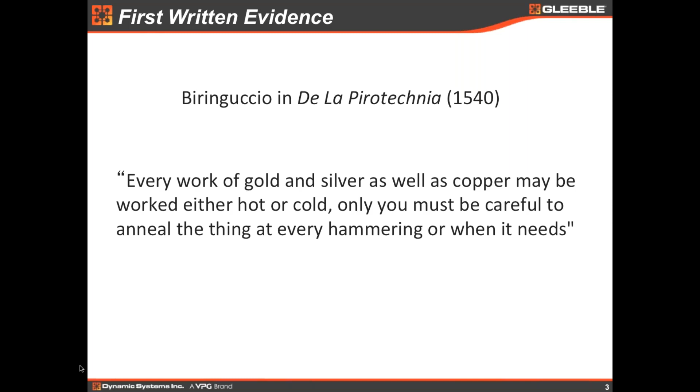In this overview, in the upper part, you see the changes in properties along the recrystallization process, and below are schematic figures of the microstructures.

We have here the deformed state, with a lot of defects, mainly dislocations. This metallic material is hard and has a high strength.

As we start the annealing process, increasing the temperature, we see a decrease in strength and hardness. This is due to the annihilation of dislocations and their rearrangement, forming the subgrains, which you can see here inside the grains.

After that we have the nucleation and growth of the recrystallization process. Here a high angle grain boundary moves over the work hardened matrix and over the subgrains, and then you see a deep decay of the mechanical properties and an increase of ductility and formability.

So after the end of the process, we have the fully recrystallized microstructure, full of grains and with very low density of dislocations, as opposed to the initial state. So you have a big decay in strength and hardness, and an increase in ductility.

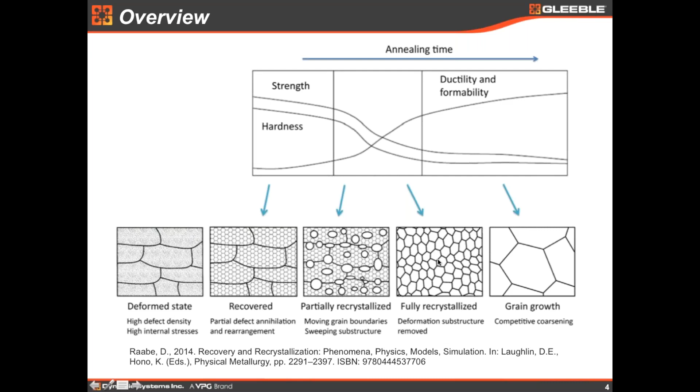It's important to remark that of all the energy spent to deform a metal, only about 10% is stored in the metal as dislocations and other defects. This is actually the driving force for recrystallization to occur.

This driving force for recrystallization is very low compared to other phase transformations. For example, copper solidification is about 13,000 joules per mole. Solid state precipitation is 2,100 joules per mole, and recrystallization of work hardened copper could be, let's say, from 10 to 50 joules per mole.

So we see there is an order of magnitude difference, and grain growth is even smaller. We'll cover these numbers later in this presentation.

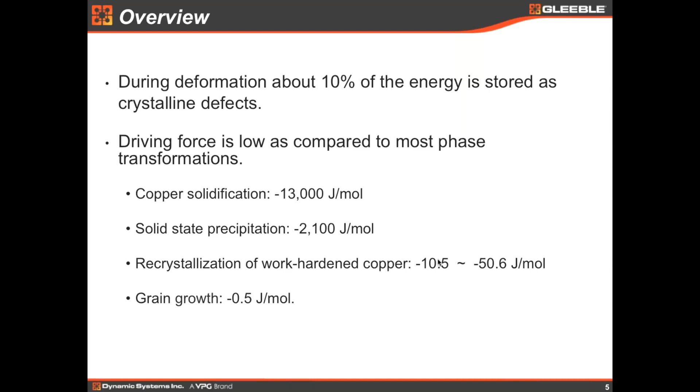Why does recrystallization happen? This is an important question. In the work hardened state, due to the defects, we have a higher free energy, and in the recrystallized state, with very small amounts of defects, we have a lower free energy. So if we give thermal conditions to that system, the work hardened state will overcome this activation energy and will recrystallize. This is an energy view of the recrystallization transformation.

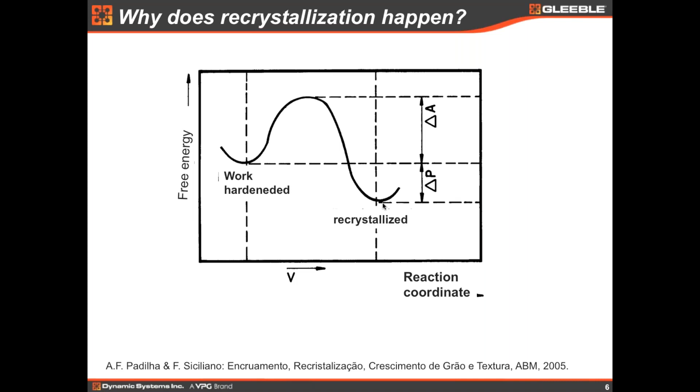Now let's discuss the driving and dragging forces. The main driving force for recrystallization is the dislocations, and it can be calculated using this equation. We've seen these equations a million times in papers and books, so I'd like to attach some numbers to all these quantities.

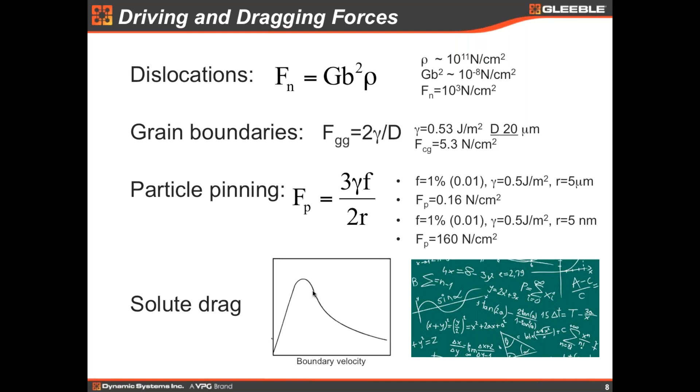On the other hand, at very high velocities, like in dynamic recrystallization, which happens very fast, the grain boundaries almost ignore the solute atoms. I think the highest effect is on static recrystallization, so this is the peak. Of course, there's a very complex formulation for that. I have many papers—if you're interested, let me know, and I can mail you the classic papers on solute drag. So let's cover it like that. Let's stop here for now.

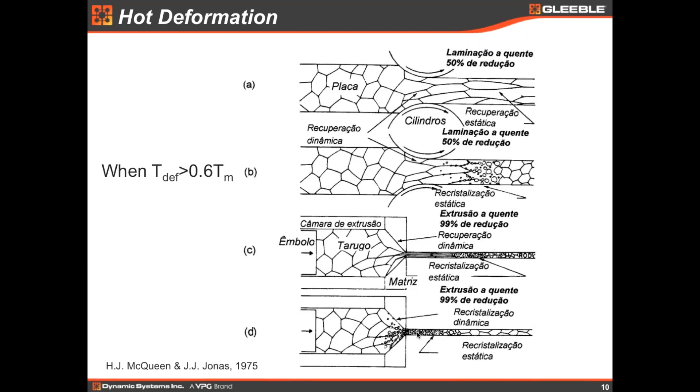So this is basically a summary of what can happen when we do a hot deformation in a metal. We can see here metadynamic recrystallization - it's a very simple concept. We have strain accumulation in the passes, and at a certain time the accumulated strain is so high that we nucleate dynamically recrystallized grains in the deformation zone, and they grow as static recrystallization outside the deformation zone.

So this is metadynamic or post-dynamic recrystallization. We have dynamic here inside and post-dynamic after that. I think this is a very clear concept, no big deal.

Just to finalize this first part, again I want to remark that recrystallization is not a new science. It's a very old science, as we saw in the 1500s, and in 1952, Burke and Turnbull formulated the laws of recrystallization.

This basically summarizes everything we need to know to use recrystallization in an industrial process or to study recrystallization for doing research. Basically, these are the main laws that include static recrystallization. We also have some annealing temperature - the degree. One of them talks about the deformation temperature, but also it includes grain growth in the last one. So this basically summarizes everything.

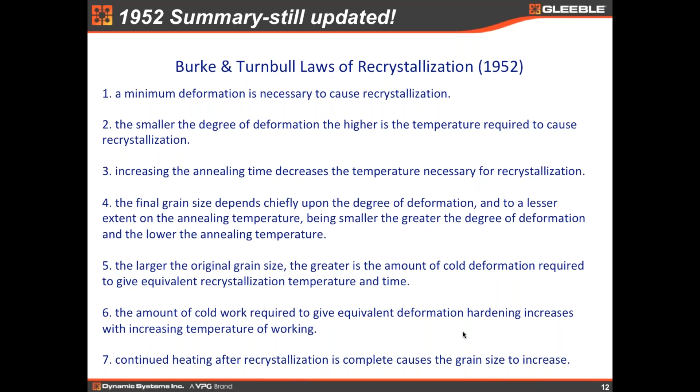Now I'd like to show how Gleeble can be of great advantage to study recrystallization. We have a few points to consider. Firstly, it's a fast and reliable method to perform heat treatment. It's very easy to use, very easy to mount a specimen, and to start a test and program the machine. I think one of the most important things is it's very reliable, with accurate data recording.

Very precisely recorded, so we can have several temperature measurements in different positions of the specimen and so on. And I think maybe the most important is that due to the Gleeble system using resistance heating, we have a uniform temperature profile. This is very important in recrystallization studies.

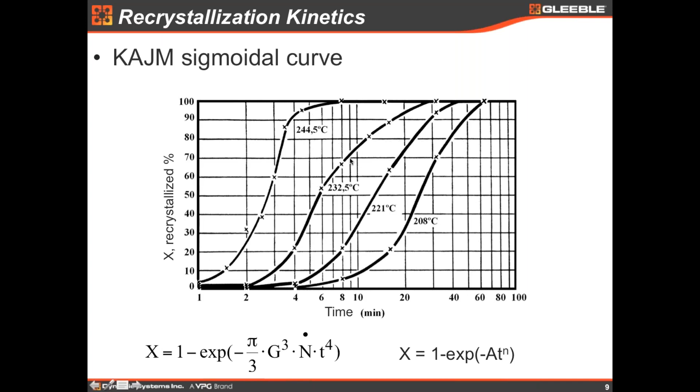So let's come back here to this figure. You see how is the effect of just 12 degrees on the recrystallization kinetics. We can easily have a gradient higher than 20, 30 degrees when you heat a specimen with a different method than resistance heating, that is uniform across the cross-sectional area of the specimen. So it's very easy to see that this has a remarkable effect on the rate and kinetics of recrystallization. I think this is one of the main points.

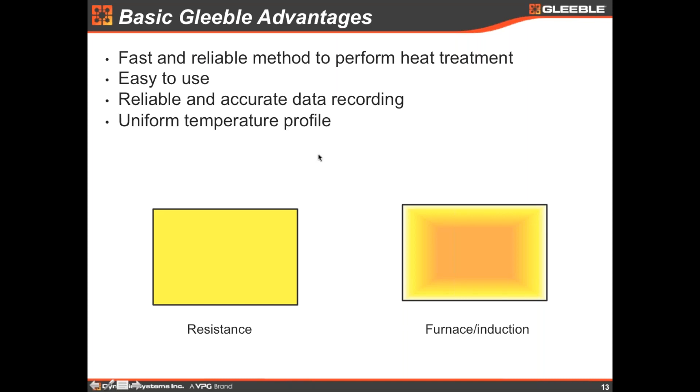So I have a work hardened specimen, and I put that, I mount that into the Gleeble, and then I program this time, let's say 1.5 seconds at this temperature, and then this time again at this temperature, and several times.

And I take all the specimens, I go to the lab, I mount the specimen, I grind, polish, etch, look at the microscope and do the quantitative metallography, and then I see how much is the recrystallized fraction. So I have the first curve.

So this is a very simple heat treatment. I think the advantage of using the Gleeble is that you have uniform temperature across the cross section of the specimen, so you can rely on what you see in the microscope. If you see close to the surface of the specimen, you can see a different microstructure as compared to the center of the specimen. It doesn't happen at the Gleeble.

So the same thing can be done. This is time consuming, of course, but at least you can generate these microstructures at the Gleeble. And not only the recrystallized fraction to check the kinetics, but you can also measure the grain size, so you know the grain size and the static recrystallization evolution.

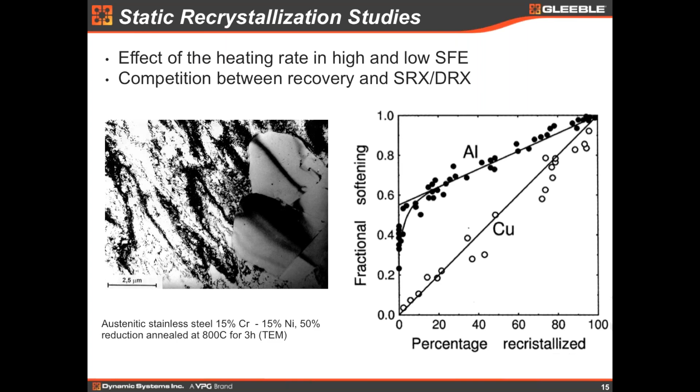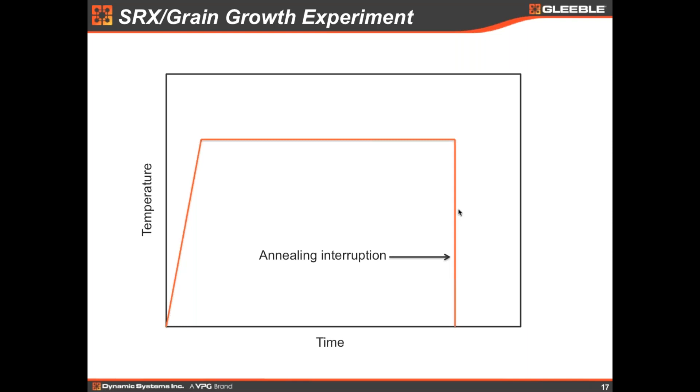So this is an example of the time temperature graph for static recrystallization and grain growth experiments, where we have a ramp to temperature and then time at temperature, and then we interrupt the annealing by quenching or just turning off the heat. This is a very simple experiment to produce reliable, uniform and reproducible recrystallized samples.

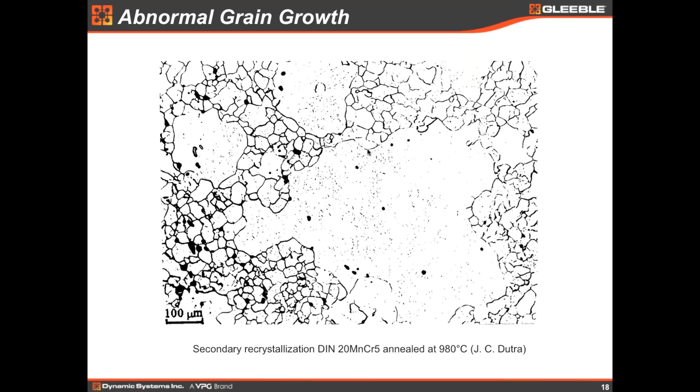There are three ways that these abnormal grains can be formed, and one is the partial dissolution of precipitates in certain areas. So in certain areas we have the dissolution of precipitates, and then the grain boundaries that were pinned by the precipitates at a certain time get free to move, and then they move faster than the other grains, growing faster and absorbing the normal or small grains. This is basically the most common way to generate abnormal grain growth and form these big grains in the microstructure.

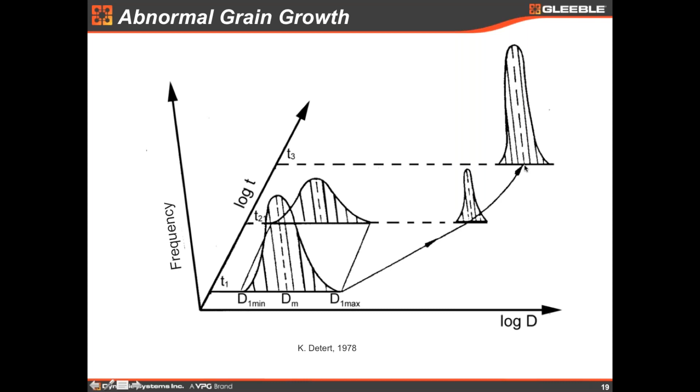As a frequency analysis here, we have the time and the grain diameter. We start from a normal distribution of grain sizes. After a partial dissolution of precipitates, we have this bimodal distribution of grain sizes where you have the normal grains here and very big grains here - these are the abnormal grains. At the end of the process, we have only abnormal grains. So this is a disaster for mechanical properties, right?

So how we can study that? Well, one of the possibilities - of course we have to study case by case why the abnormal grain growth is happening. But usually it's associated with high heating rates, because at high heating rates you have a higher probability to have this partial dissolution of precipitates in certain areas, and then this will generate the abnormal grain growth.

So we can check - you can go to heating rates higher and higher. As you may know, the Gleeble can go to 10,000 degrees C per second; this is the maximum we can go, and we can see how these high heating rates can trigger the abnormal grain growth. So we test the different heating rates and check what happens. So this is another example.

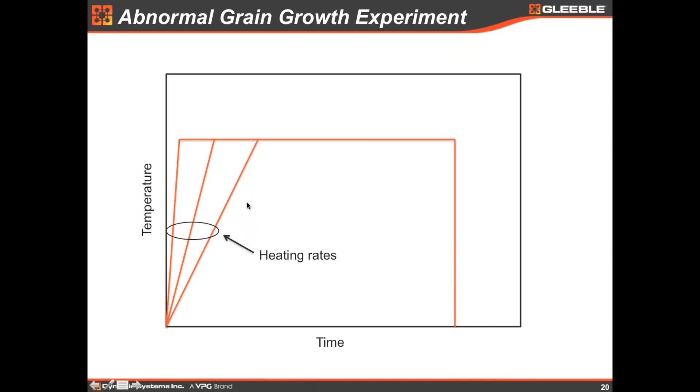And then he said, oh, what about the processing parameters? We want to correlate the recrystallization kinetics with the processing parameters that we are preparing or processing our steel or our copper or our aluminum at the plant.

So it's easy to derive, by performing mechanical testing, the time for 50% recrystallization or 50% softening. We consider for austenite that they will be equivalent.

So we have a way to derive the T50 and correlate that with the actual processing parameters or actual experimental parameters. So that's why this became very popular, to use the sigmoidal curve equation in this form.

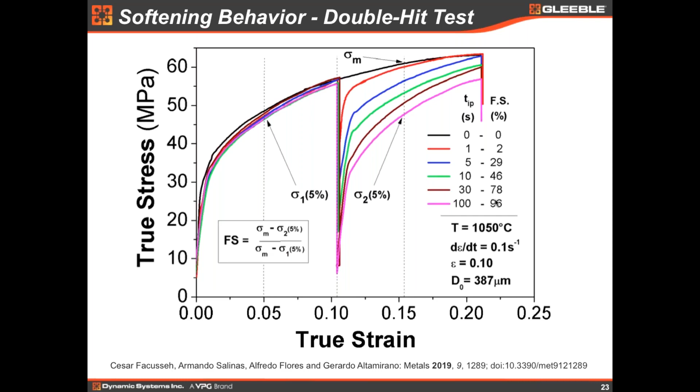This is very important in hot rolling because we know what kind of load to expect in the next pass. Extremely important. Also, we can estimate the grain size by doing different deformation schedules.

We see here several passes with small deformations at constant temperature, and then fewer passes with high deformation in the beginning at high temperatures, then lowering the temperature, increasing the stress, and having lower deformations at the end.

Or we have these two big deformations in the beginning and 3 small, or 3 small in the beginning and 2 big. So we can test all these crazy rolling schedules, and at the end you can get a sample and specimen and measure the grain size. So we see that there's a big difference.

So this is a typical industrial deformation process. We see that we reach the smallest grain size. And as opposed to this, it's not usual - sometimes, let's say in the forging process, you may get something like that, but usually not.

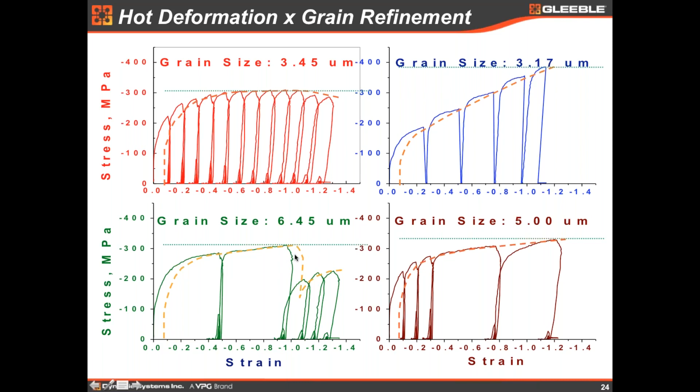Another example is the continuous annealing line. I think most of you are familiar with it. This is a monster equipment, almost impossible to stop. It's a continuous process - you don't want to stop that because it represents a lot of production time lost, and also a lot of material loss, because maybe there's almost 1 kilometer of strip inside this line.

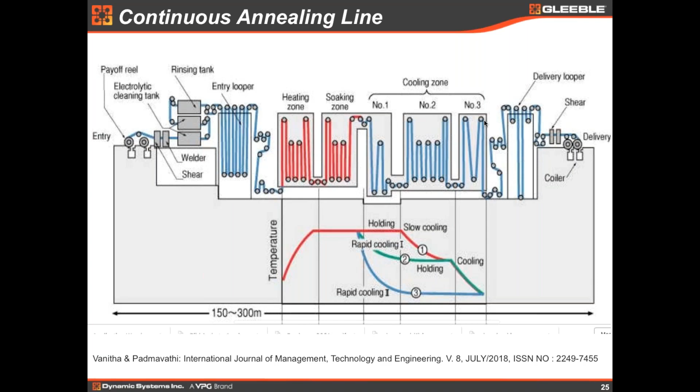So of course you don't want to sacrifice all this big amount of material, and you want to understand what's going on, so you can calibrate your heating or thermal cycles - heating, soaking, and cooling zones. This should be tested and calibrated offline, not in the line, because the line will be a production disaster. So what we do, you can use a Gleeble, a large sample strip annealing mobile conversion unit, and test a sample. It's a quite big sample that we can test and run the exact thermal cycle that we plan, or that we want to improve in the continuous annealing line.

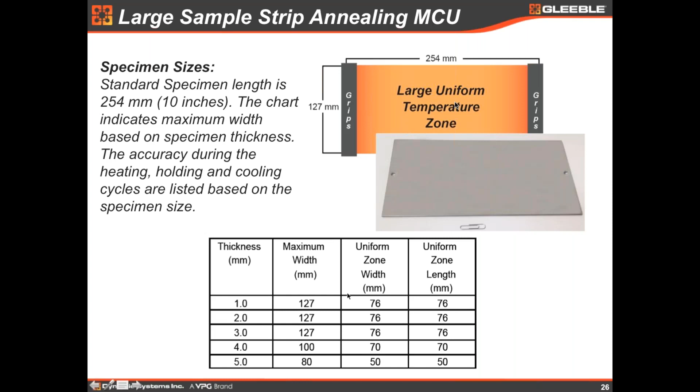We have a very large uniform temperature zone in this specimen, so we can do a hole expansion test. You can stamp a tensile sample in this big sample, and at the same time follow the exact heating cycle or thermal cycle that you have in the continuous annealing line. So you have information about the microstructure and also mechanical properties by running the test offline, avoiding a huge experimental cost to understand what's going on in the actual line. This is another very important use of the Gleeble.

Of course, we have a work-hardened ferrite. Most of the time we have a work-hardened material or a deformed coil, and we have recrystallization happening in the first plateau. After that, depending on the cooling cycle, you have the formation of the phases that you want to form.

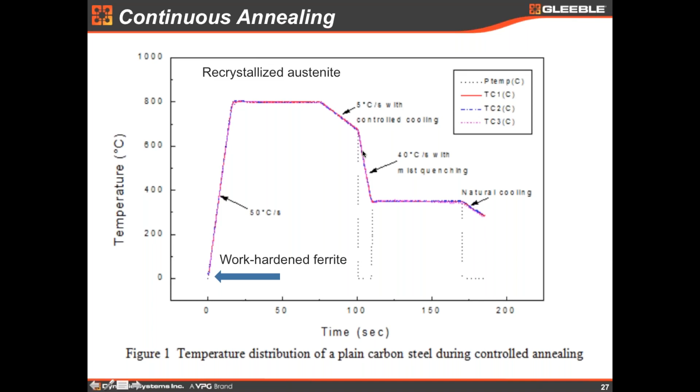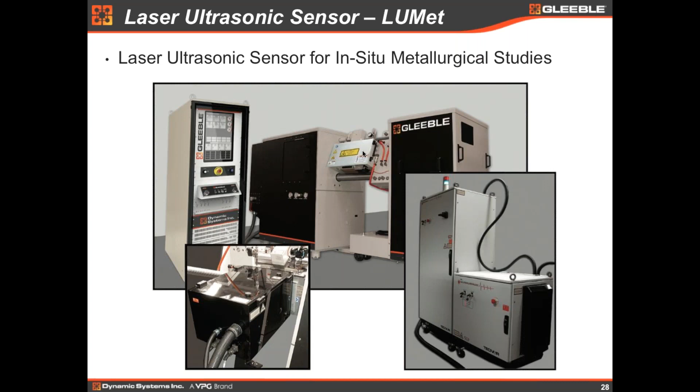So there is a correlation - there is a software that correlates the amplitude and velocity of the wave with the metallurgical state of the sample. As an example, we can correlate the velocity of the wave and the time, and we see how this correlates to different stages of recrystallization. This is a deformed state with low velocity, this is a partially recrystallized state where velocity increases, and at the end of recrystallization, velocity increases even higher.

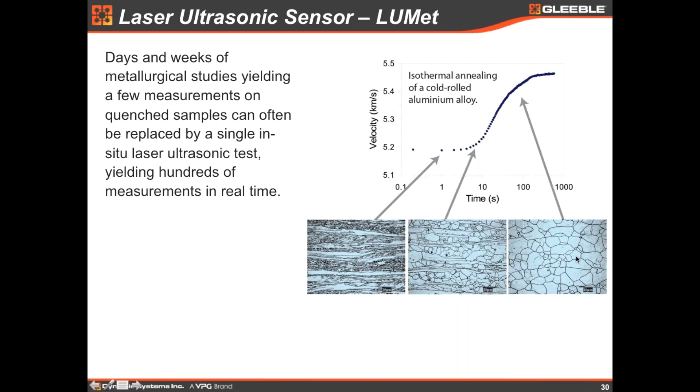It needs some calibration at the beginning, but you can imagine how to generate and see that in real time during a hot deformation test. This saves days or weeks of metallographic studies in the laboratory. With just one sample, in a few minutes, you can know exactly what's going on in your specimen in real time during the test. So this is the beauty of the LUMet.

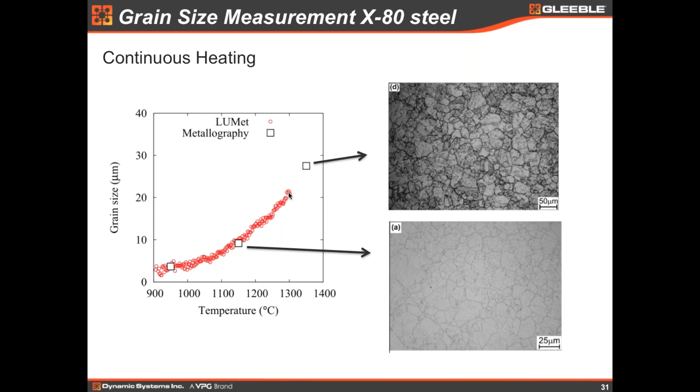And with the LUMet, we have an excellent correlation with just one specimen. In real time, we can just keep increasing the temperature and measuring the grain size. We can generate hundreds of points that might take weeks to do manually. So this is another application for recrystallization and grain growth for the LUMet. I think that's the end of the presentation - we showed a summary of recrystallization at low temperatures and high temperatures, and also grain growth.

And a summary of the microstructural changes and how this can be studied and researched at the Gleeble.

I just want to do a pre-announcement of the next webinar. We'll focus on TMCP, hot rolling, hot deformation, and high temperature recrystallization. And I'll try to cover firstly continuous casting and items like ductility during casting.

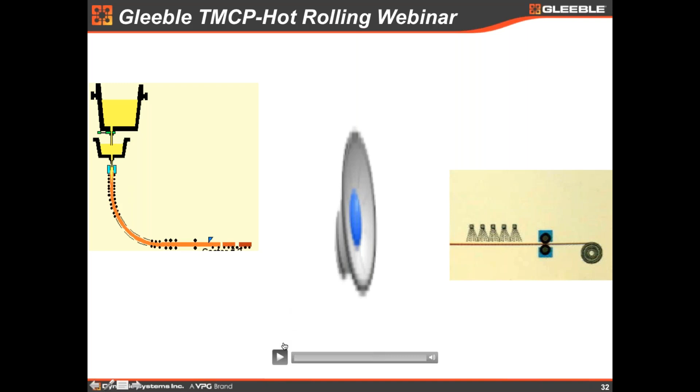I just added a short video, coming back to my roots. The other day I found the old pasta machine from my grandmother. Oh, it doesn't work. Let's see if it works now. Yeah, so this is my grandmother's pasta machine, and a week ago I decided to make pasta.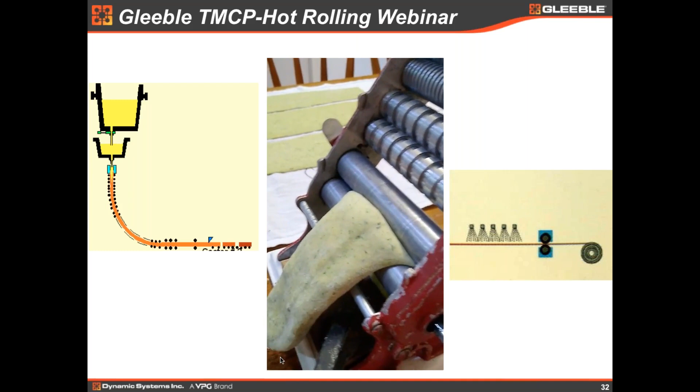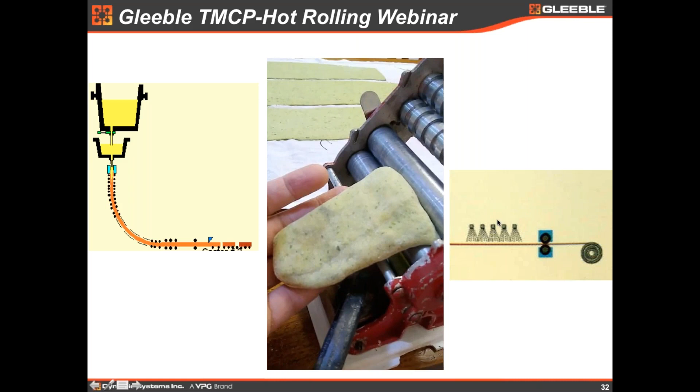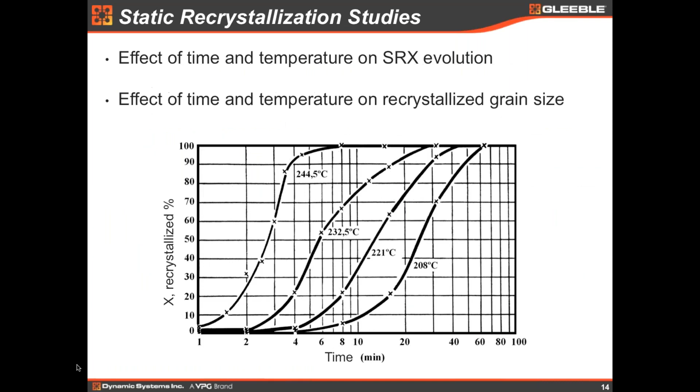Yeah, let me cover that. We can use 20%, 50%, or 70%. The reason to use 50% is that it's easier to reach - it's not the very beginning. If you say 5%, that's more difficult to catch in a microstructure. Everything that changes from 50% is a parameter here, because this is the natural logarithm - I have the exact formula in my thesis printed here. Let me check. This constant here is because it's 50%. If it's 20%, we just change this constant, but it will have the same effect. Well, I'll find that sometime, perhaps we can get to that later. But this kinetics equation - this constant is due to the 50%. If you use 20%, you have a different constant.

Okay, thank you. Next question is: how is recrystallization affected by segregation of a phase from solid solution to the grain boundaries? Will it slow recrystallization or shift the temperature?

I'm sorry, can you repeat the question? Sure - how is recrystallization affected by segregation of a phase from solid solution to the grain boundaries? Will it slow recrystallization or shift the temperature?

Well, usually as a rule of thumb, as you increase the level of solutes or impurities, you decrease the velocity of the grain boundaries. So recrystallization will be affected because the kinetics will slow down as we have more impurities. For example, a practical case: if you have pure aluminum, let's say 5 nines aluminum, very pure, it recrystallizes below or at ambient temperature. Also metals like lead have dynamic recrystallization at ambient temperature if deformed. But this is for pure metals. As you add impurities, the recrystallization temperature starts to increase and the kinetics become slower.

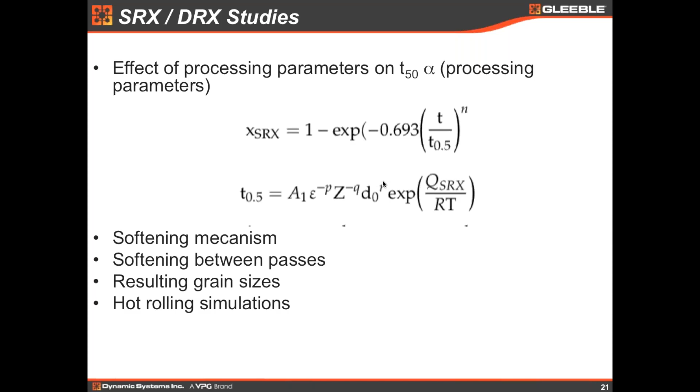It's easy enough to understand what those temperature profiles are by embedding thermocouples in a coil. You can certainly simulate that in a Gleeble by running a thermal simulation test that matches what you expect to happen in your actual coil. But you'll probably need a couple of simulations to actually replicate what happens in a batch annealed coil, because there are different temperature profiles in the center of the bulk of the coil versus the ID or OD laps.

People typically don't use a Gleeble to simulate batch annealing because it's a long process, 24 to 30 hours, and often people have other work on their Gleeble. They don't want to tie the Gleeble up for that period of time, but it certainly can be useful for that.

Great. Thanks, Brian. We have a question here that says, besides studying heating rate effect on abnormal grain growth, which other experiments could identify abnormal grain growth causes on a Gleeble machine?

The abnormal grain growth can be caused by, firstly, the difference in surface texture or the surface tension in different grain orientations. But the most common cause is the partial dissolution of precipitates.

We cannot do a specific partial dissolution experiment in a Gleeble, but we can study a process parameter, that is, the heating rate. For high heating rates, usually you have a higher probability that this partial dissolution of precipitates will happen, and at a certain point we will generate a very big grain size, which turns into a bimodal distribution of grains that is very bad for mechanical properties.

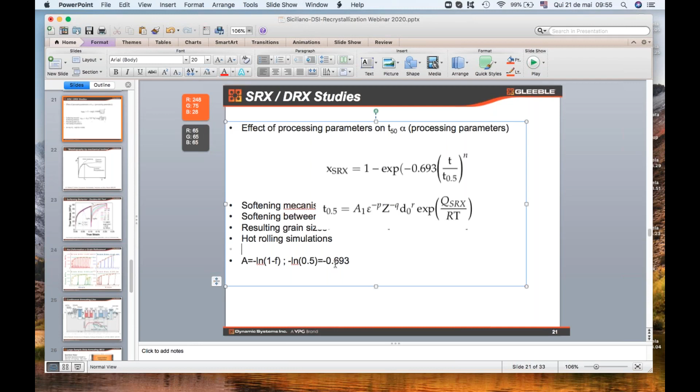Thank you. We had a question come in, and I think it's a good one. If you ask metallurgists at DSI, they may get conflicting answers. So I'll put Brian and Fulvio on the spot here. The question is: what is DSI's view on the differences between uniaxial, plane strain, and torsion? Academics use a range of these and each have benefits. Has DSI done a cross comparison, as Gleeble is capable of doing all these modes? It would be useful for a cross comparison. Fulvio, you're a torsion guy, maybe you can address that question.

Okay, so the main difference between the two is more geometrical than, let's say, in stress state. First thing, all of them are shear deformation: rolling, plane strain, and torsion. All of them are plane strain deformation, so we have the deformation in two directions only. I think that's why these two are the preferred methods to simulate hot rolling.

I think the plane strain compression, if you look sideways, is geometrically very similar to rolling. If you have the two rolls, one at the top of the other, and a strip in between, it's like you have the two plane strain compression anvils on the upside and downside of the specimen, and then you see there's a very close geometrical similarity.

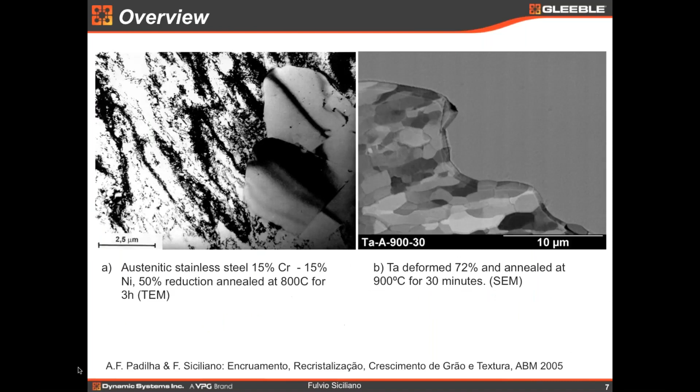There were a few questions about the Lumet, including whether it has a microscope already installed. I think I can ask Brian Allen to spend a couple of minutes. We're about out of time, but let's review briefly how the Lumet works, since it seems like a great opportunity to shorten testing time. Brian, do you mind addressing that, and Fulvio, maybe you can jump to those slides as well.

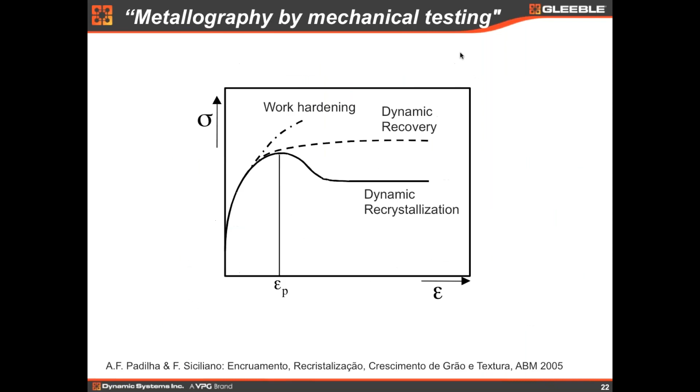Sure, absolutely. So the Lumet actually works by measuring two things in the material. It measures the speed of sound in the material, and the speed of sound is calculated by the space between the echoes. We know the dimensions of the sample, and we know the time it takes for that shockwave pulse to go through the sample, echo off the back, and come back to the surface. That tells us the speed of sound in the material.

Now, it turns out the speed of sound gives us a lot of useful information. It's directly related to the bulk modulus of the sample, so you can certainly measure that. The speed of sound can also give us texture information, because it's actually different in the different crystallographic directions of a sample. So for instance, with a single crystal sample, I would get a very different speed of sound depending on which direction through that crystal I measured the echo and the return.

That can give us information on annealing, because if, say, I have a sheet and I'm annealing that sheet, I can look at the texture change from the cold rolled texture to the fully annealed texture, and I can get information on that.

The other thing we often get from the Lumet is the grain size, which can be related directly to what we call the decay envelope, or the reduction of energy of each echo. The amount of energy scattered as that echo moves through the sample and back to the surface is directly related to the grain size. So we can make a correlation curve and understand the grain size based on the decay envelope of that echo.